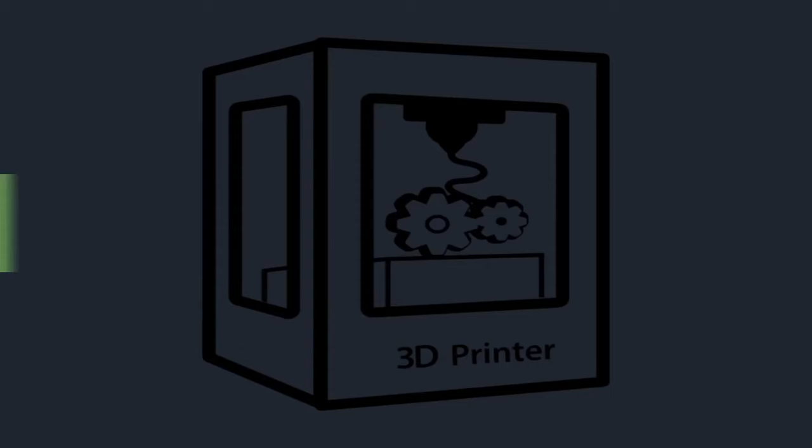Hi, we are the Make X team. After more than 1 year of development, we present our new 3D printer, the M1. This is the first affordable and high-resolution desktop DLP 3D printer available. M1 software is simple and user-friendly, while still offering rich functionality.

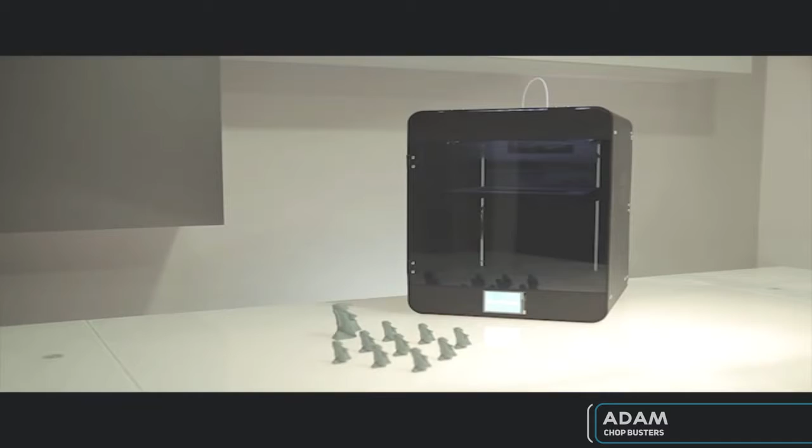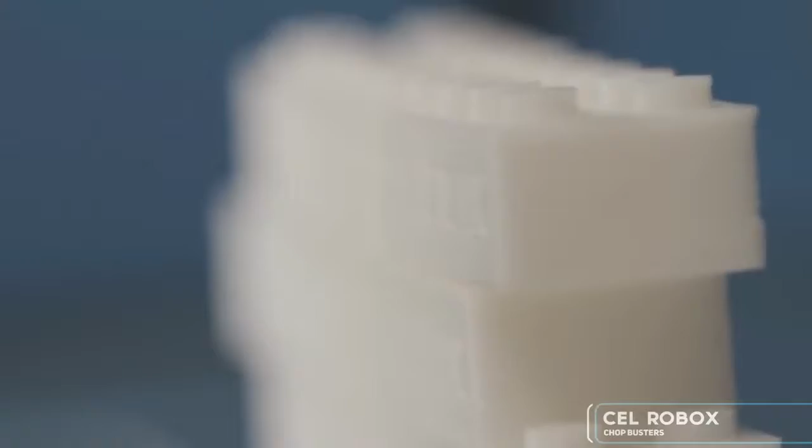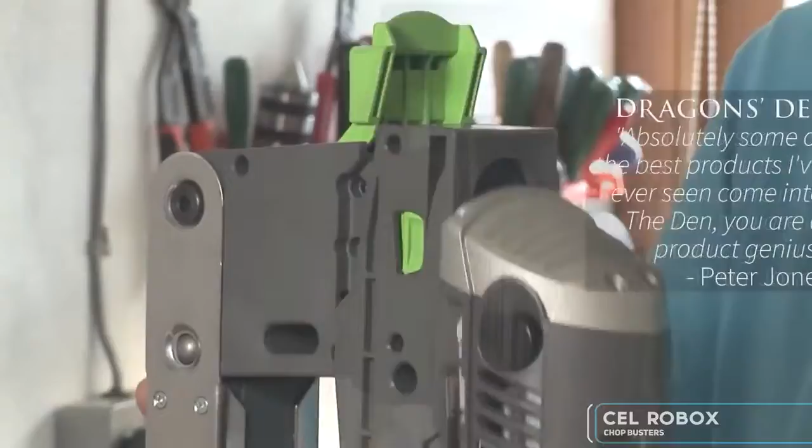This is Robox, a desktop manufacturing platform. I'm Chris Elsworthy, lead engineer for the project. CEL UK is a product design and development company based in Portishead near Bristol in the UK. We're passionate about design and we're famous for a number of consumer products that have been released, most notably the Power 8 Workshop, which was released over 3 years ago, and we now have over 10,000 units in circulation worldwide.

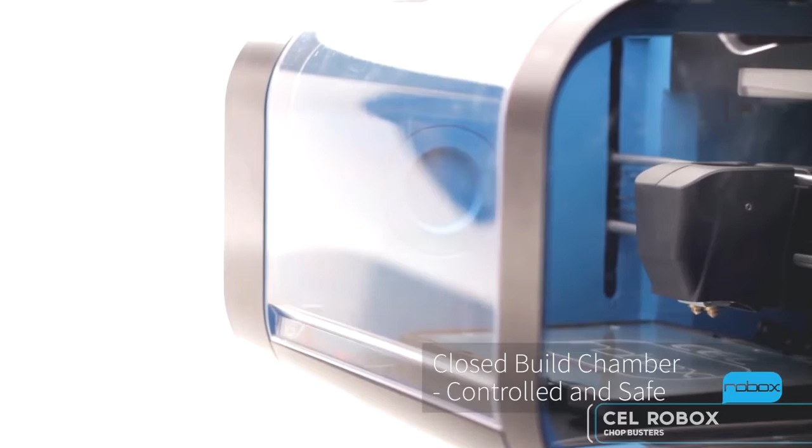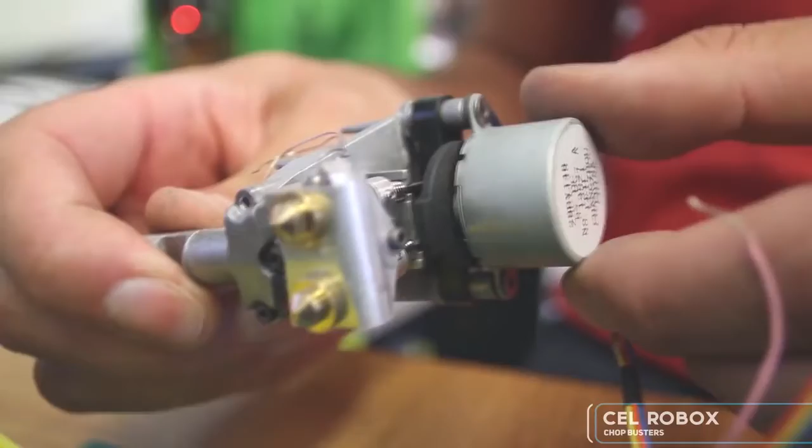Robox has every system in place to print with the materials available on the market at the moment. We have a nozzle system which includes needle valves, so we're able to shut off the flow of plastic instantly. This means no more oozing, no more stringing as you move between parts, and no more bumps on the outside. This means perfect parts every time.

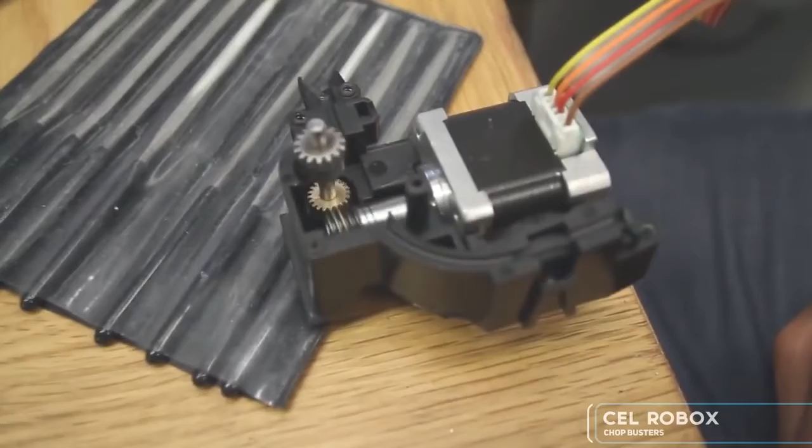We've also got a new extruder design that rather than relying on one feed wheel and a follower, we have two contra-rotating feed wheels that grab hold of the filament, ensure it never slips, always forces material to the head and reduces the chance of blockages. And not only that, the extruder includes a closed feedback system, so we have an indexing wheel that monitors the filament moving into the extruder versus that that's coming out.

So if there is any stall or blockage, the software knows straight away. As soon as it knows, it can stop the print. You can then intervene and fix any problem that may have occurred, and then the printer will resume from where it left off. Something I don't believe has yet been seen. Never before has a 3D printer been offered with this higher specification at such a low price.

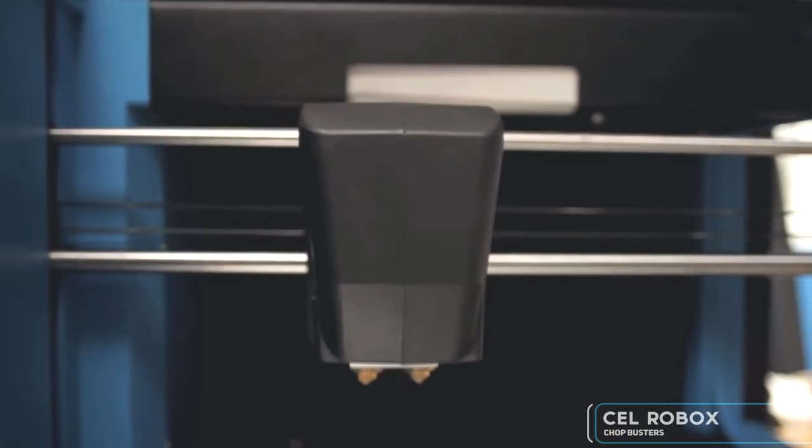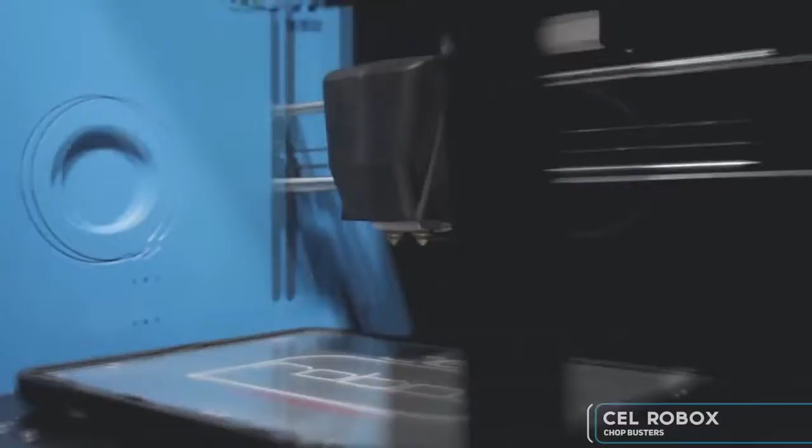In our head, we have a twin nozzle system. This has a 0.3mm and a 0.8mm nozzle. This means that you have a high resolution but low speed nozzle for completing the high quality surface finish and perimeter of the part, and then a much larger nozzle which is capable of filling the part, resulting in print times of up to 300% greater than our competitors.

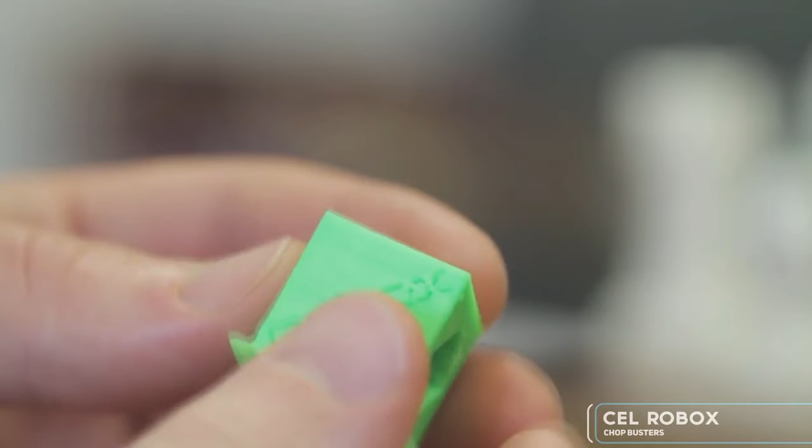Because we have a very rigid frame, we can operate the printer at much higher speeds than normal. And not only that, we have a Bowden tube extruder so that the extruder is kept separate to the weight of the head. This allows us much higher printing and travel speeds. Robox isn't just a stylish 3D printer. By simply removing the head, we can add much more functionality to our platform.

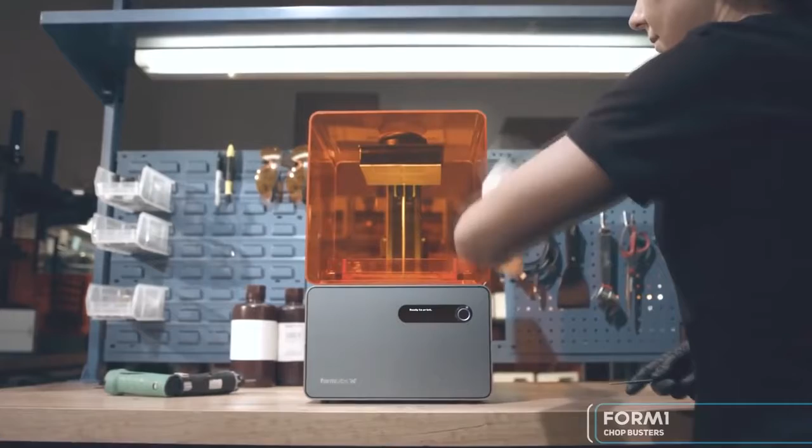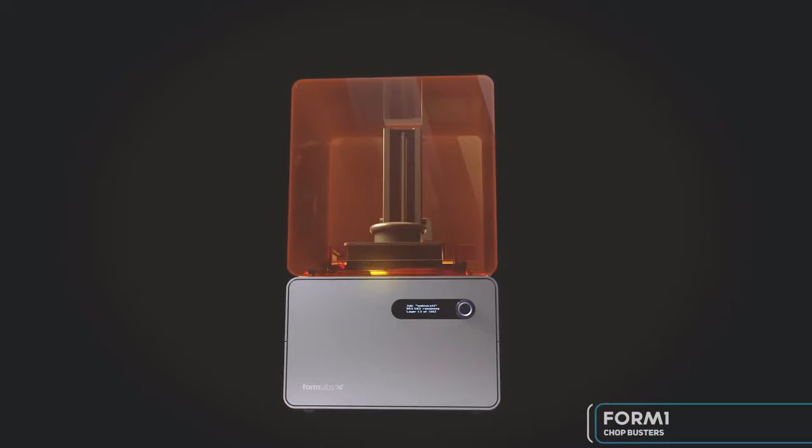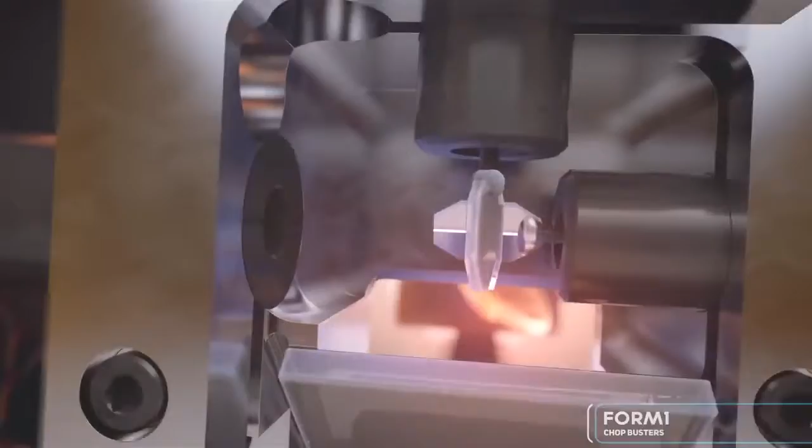With thousands of Form 1s now being used by designers, engineers, and artists around the world, we've learned a few ways to improve the world's first high-resolution desktop 3D printer. And now, we're excited to present the Form 1 Plus. First, we've added a new laser that is 4 times more powerful, cutting print time by up to 50%.

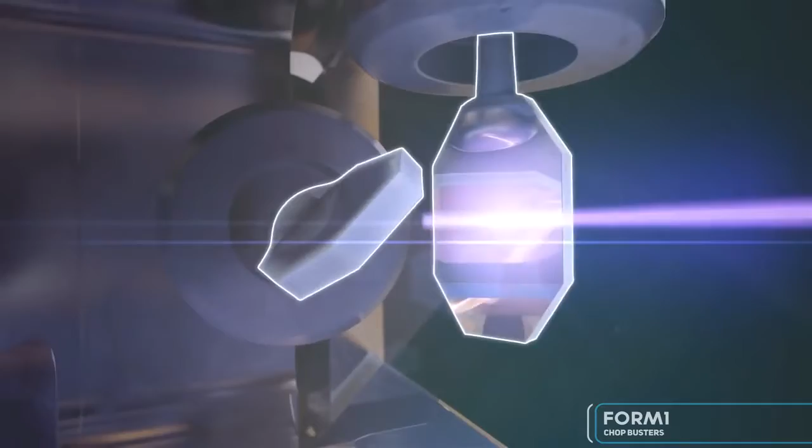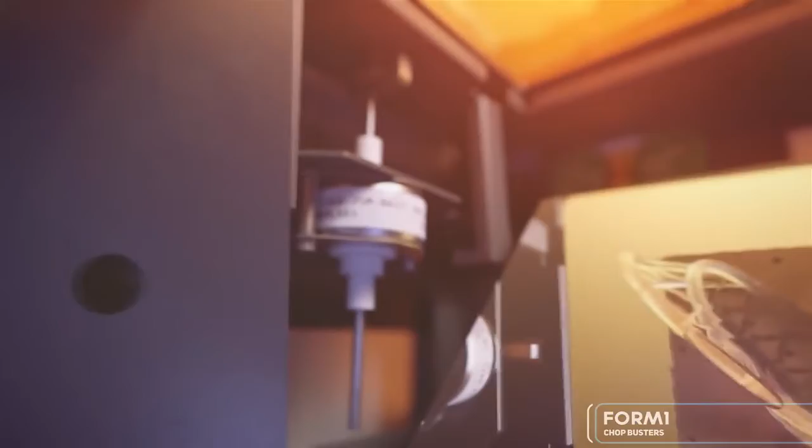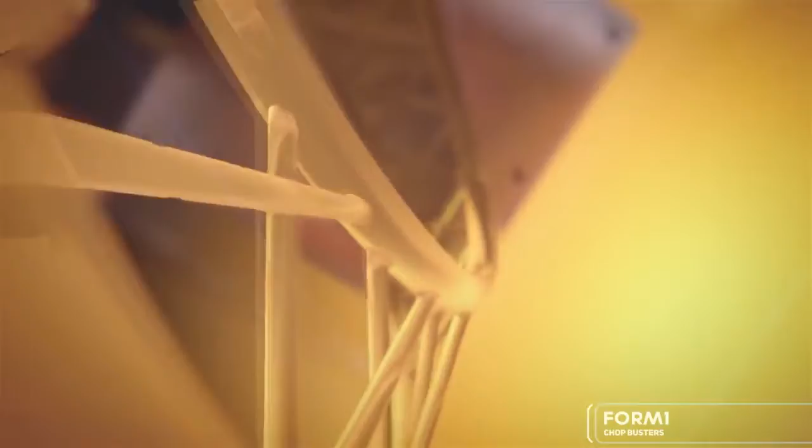At the heart of the machine's precision and resolution is a new galvanometer control system that moves the laser more quickly and accurately than the previous generation. The redesigned peel mechanism is stronger and more durable, reducing wear for better reliability. And finally, our new injection molded resin tanks are now made with orange light-blocking acrylic, allowing you to store your unused resin outside the printer whenever necessary. Thanks to these new additions, you'll be able to 3D print with increased ease, precision, and speed.

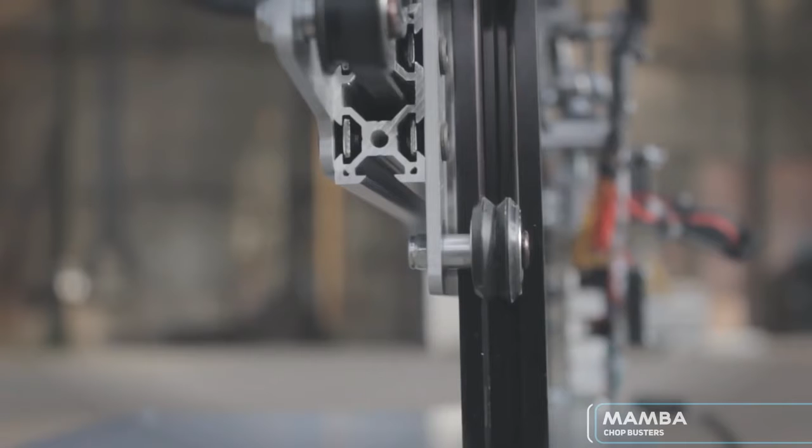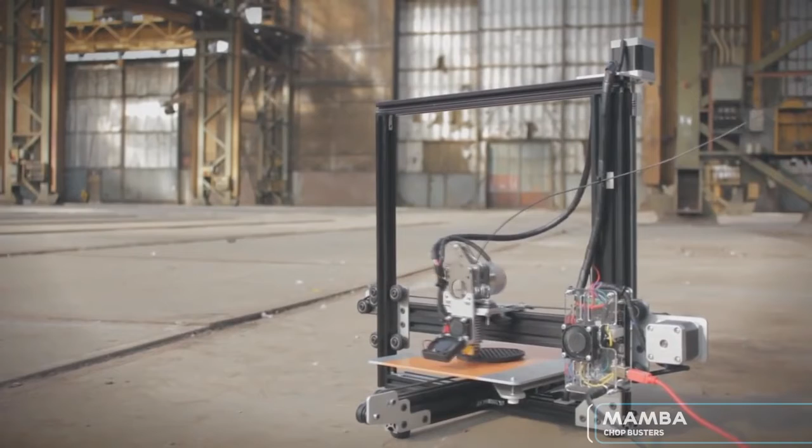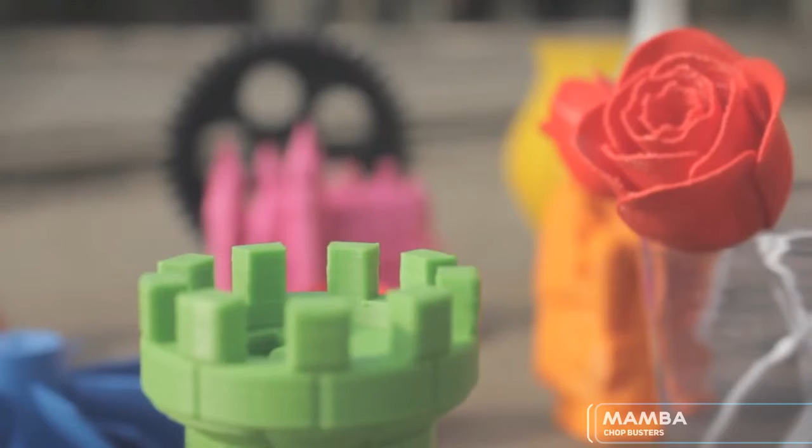Hi Kickstarter, my name is Michiel. I'd like to present to you the Mamba 3D. Two years ago I saw my first 3D printer and I was immediately intrigued by all the possibilities 3D printing could give you. So I started to build my own printer, and after seeing the prints that came off of the printer, the excitement was even greater than before. It was the first time I could physically produce products at home.

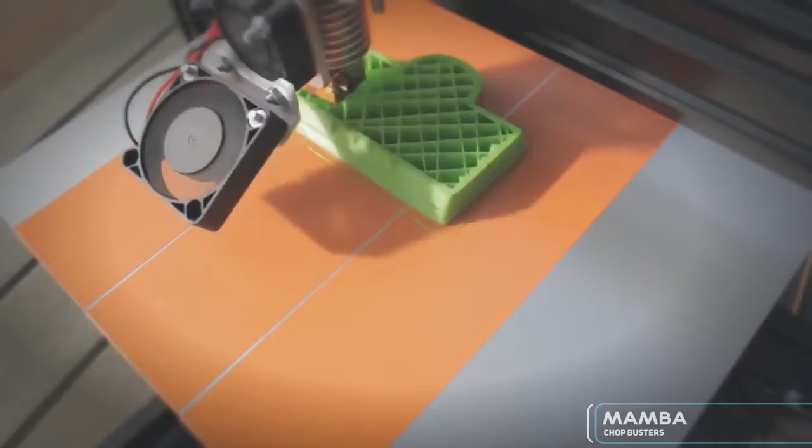For the last 10 years I worked in industrial automation as an engineer. I designed electronics, software and mechanical designs. Recollecting what was needed to build my first printer and to start using it, I noticed you need some technical skills to complete it and to use it. So with that in mind, I wanted to design a printer that was easy to build and easy to use. So we broke down the printer to its basics, just to focus on high precision, high speed and high quality.

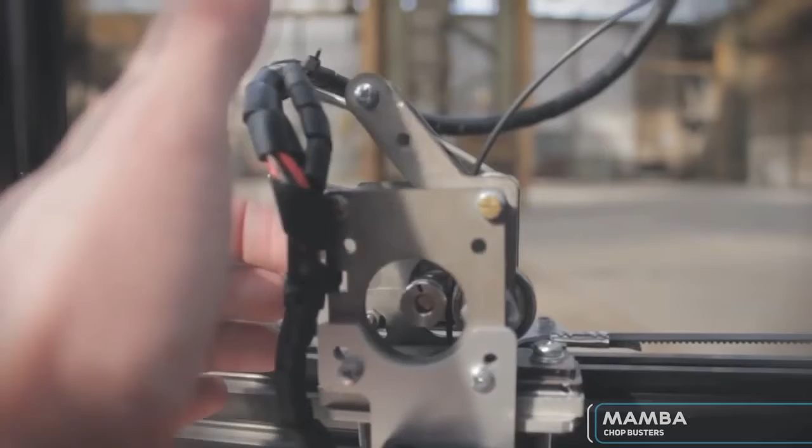The printer is made out of an aluminum frame. It's an open source hardware frame, and together with the laser cut metal plates it makes a rigid printer. We designed a custom extruder drive for the printer, so it is easy to change your filament. You just push back the lever, take your old filament out, put new one in and start printing again in seconds.

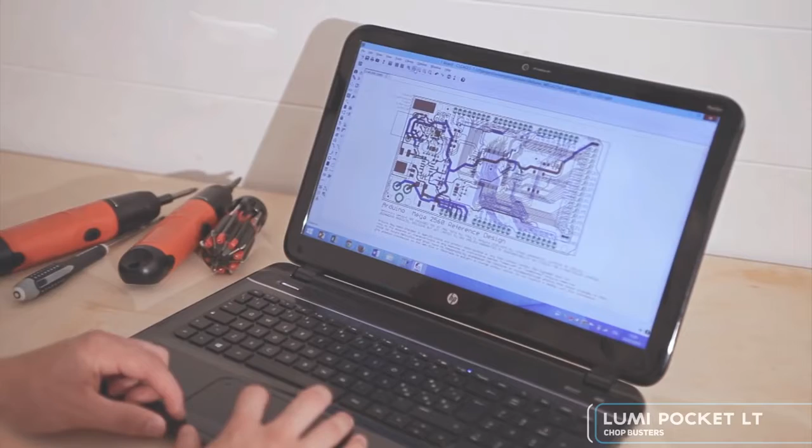Pauline needs to 3D print the jewel she has just created. Henry wants to make the PCB he has designed. Roberta would like to engrave an image on plywood for an original present. What do these people have in common? Great ideas! Wouldn't it be nice to have a single device to do all of this? How can we help them make these ideas real?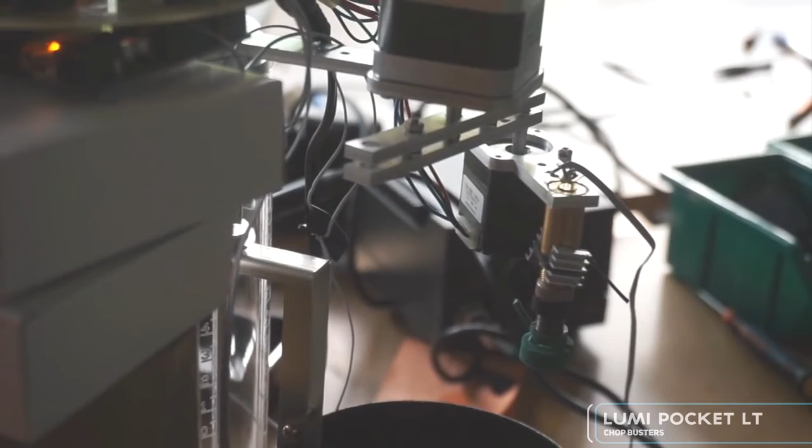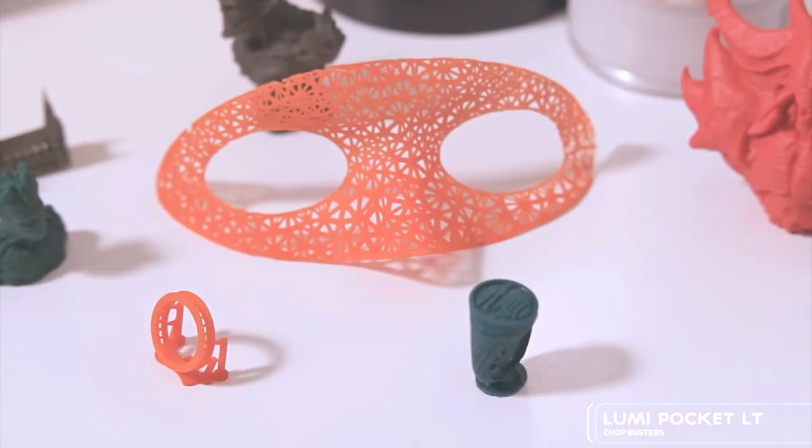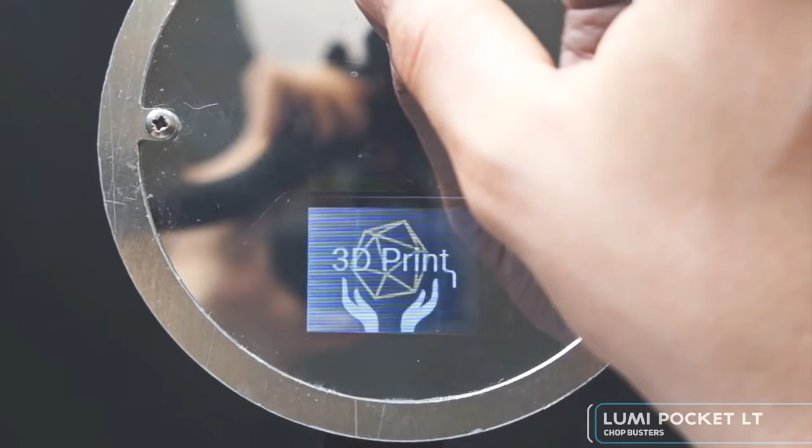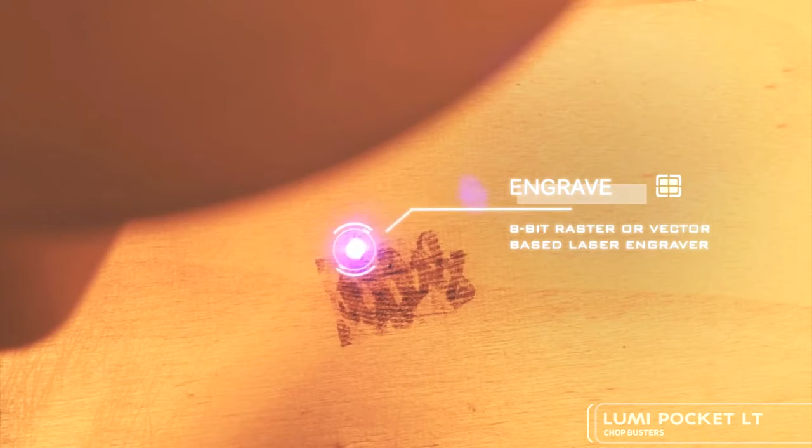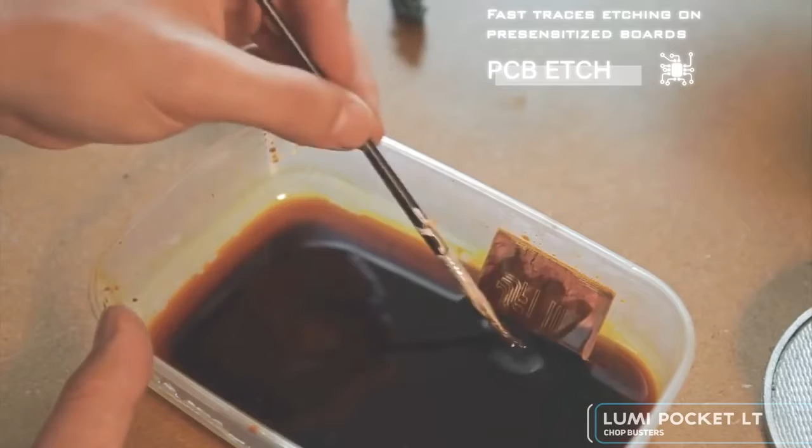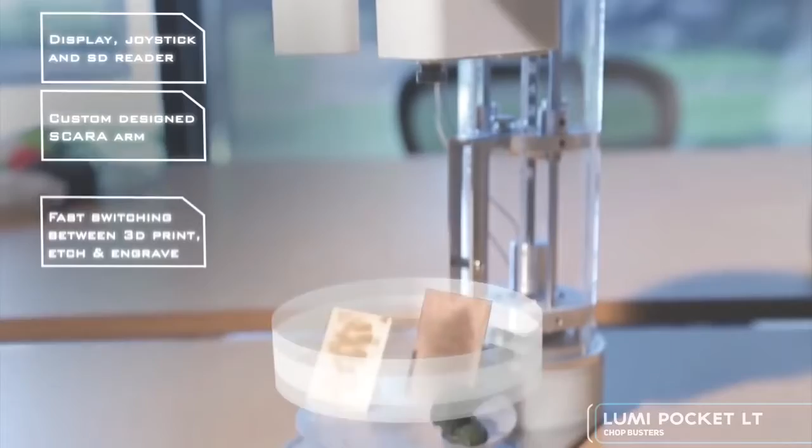We are Lumi Industry. We have developed different models, produced and shipped them to our backers. We know how to turn an idea into a product.

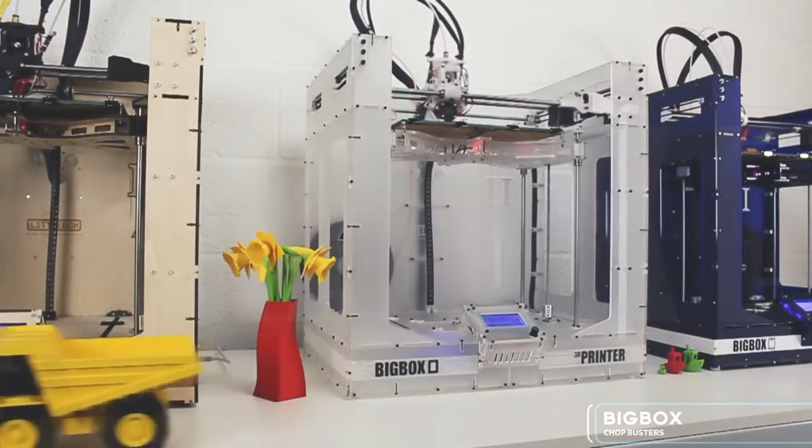I'm Josh from E3D. And Sanjay, also from E3D. I'm Greg from the Little Box Company. So we've got together and we're making a new printer called the Big Box. The Big Box is a no-compromise, high-specification 3D printer, combining the best in print quality with a huge print volume. The large build volume means that you can take on ambitious projects, getting you higher productivity, print bigger stuff, and more of it.

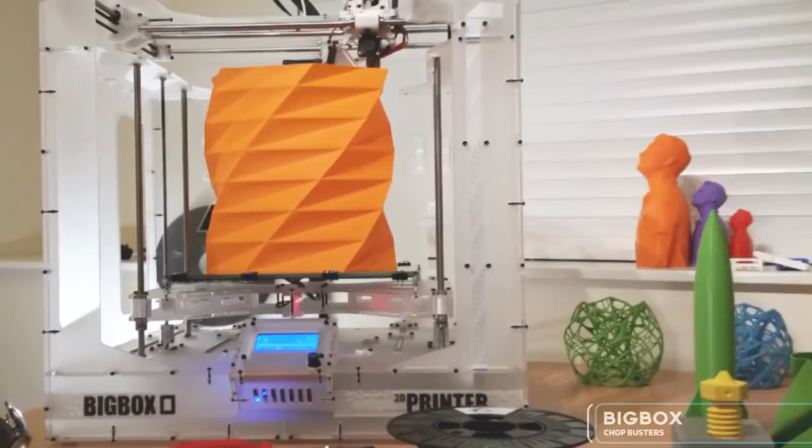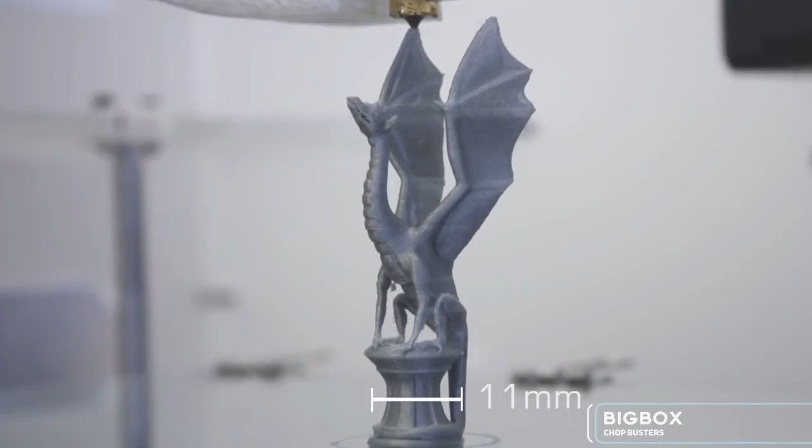Thanks to Big Box's incredibly precise motion system, you'll get twice the standard print resolution. Using an E3D extrusion system means that you can print any material, get high quality prints, and have a modular printer that can grow as you take on new projects. Big Box has great cable management and ease of access. We've integrated a universal spooling system and made Big Box simple to use with a standalone controller.

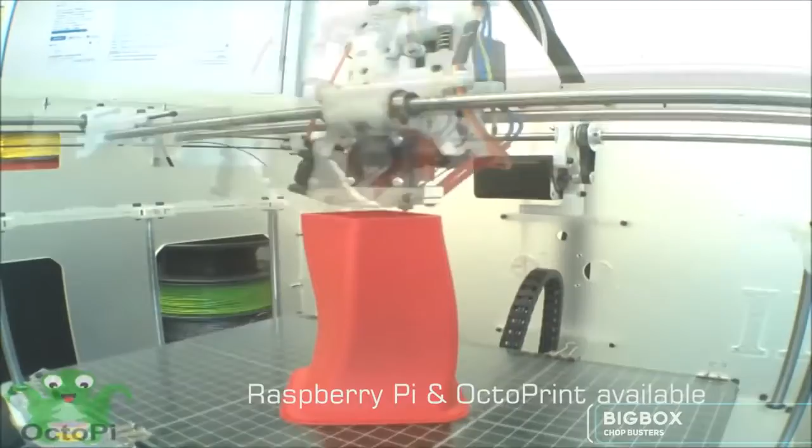Big Box brings together experience in designing super precise, very high resolution motion systems for laser cutters and implements that with 3D printing hot end from E3D.

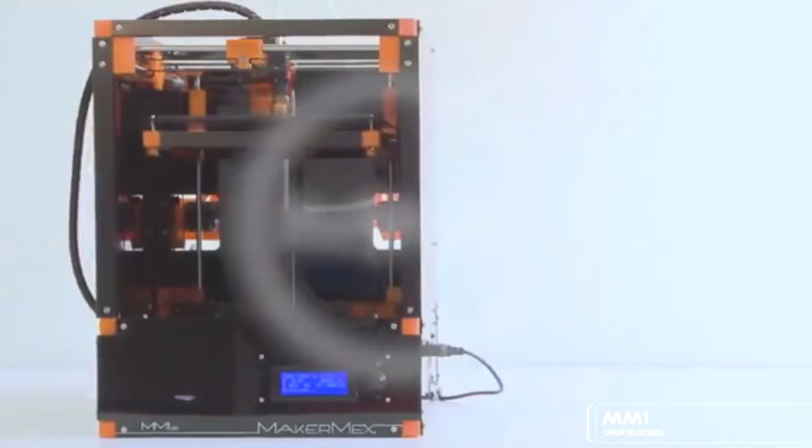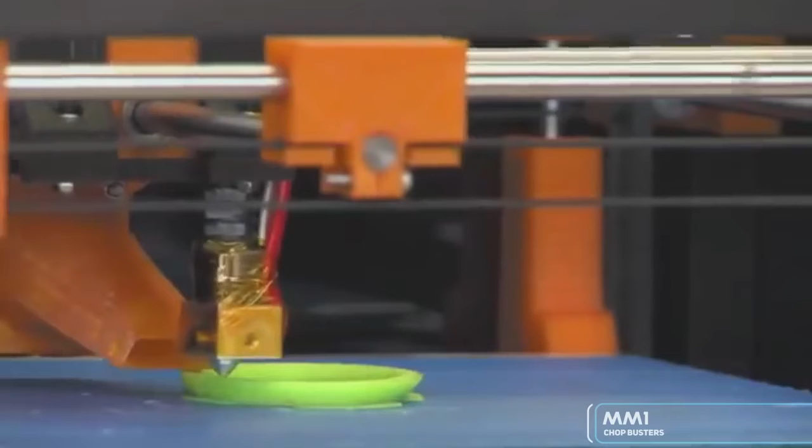This is the MM1, the world's first modular 3D printing system. Here at MakerMex, we are makers, just like you. And makers never settle for simple. We never settle for completed. We are always modifying and improving what we have. That's why makers are so great. And we see how the world of 3D printing is changing so quickly. And let's face it, nobody wants to spend their hard-earned money on something that will be outdated in 6 months.

So we thought to ourselves, why settle for a 3D printer that can only do one thing? Why can't my printer easily switch from printing biodegradable PLA right over into printing high-temperature polycarbonate? Why can't I print high-quality prints with a dual extruder setup, and then doodle 3D icing on my kid's cookie a couple minutes later? Or in 6 months, why can't my printer do what all the new printers can do? Why do I have to buy a new one?

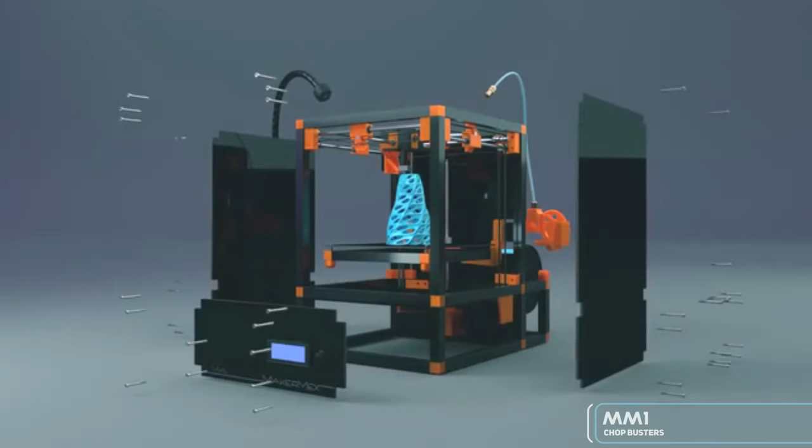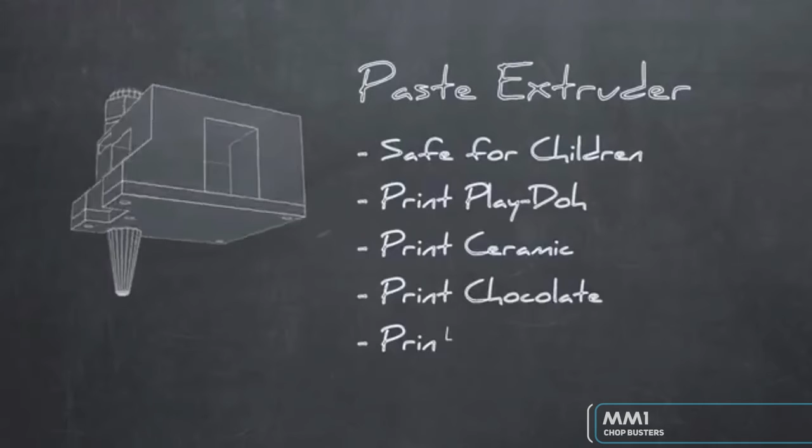We think that's crazy. That's why today we introduce you to the MakerMex MM1 modular 3D printing system, a fully modular 3D printing system that allows the user limitless 3D printing potential. Our system currently has several modules developed for easy-to-use fun for the whole family. Simply swap out the single extruder for our paste extrusion system, or for advanced printing, swap the dual extrusion heads, or even our high-temperature head for the more advanced makers.

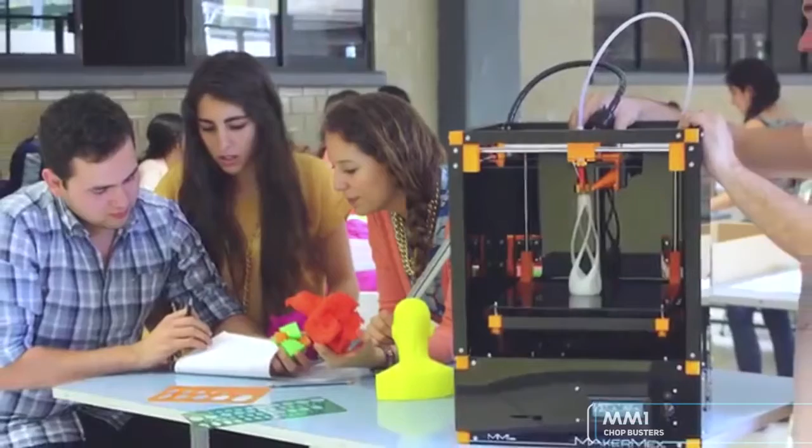With just a few clicks and a couple minutes, the user can easily modify the printer to the medium they desire, making the MM1 modular 3D printing system great for home, office, or the classroom.

I was immediately surprised by the beauty and elegance of this design compared to all of the other 3D printers. We're using 3D printing to create custom GoPro mounts. It's a gorgeous looking printer. These guys have really done their homework, and it's definitely going to be integrated into our whole film production pipeline.

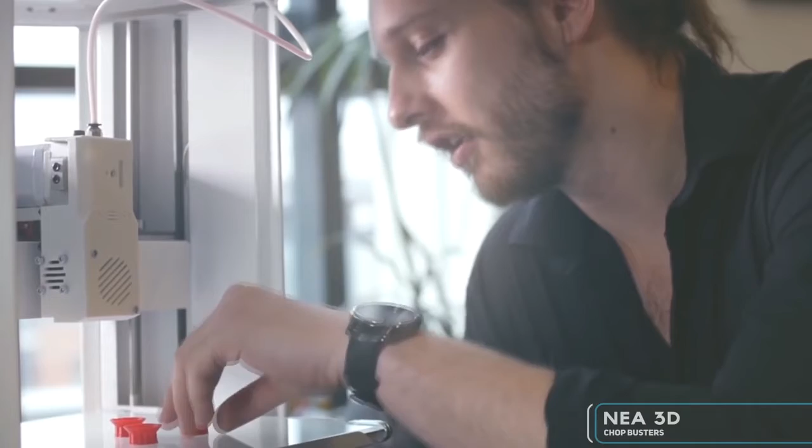A true desktop printer should be compact, good looking, super easy to use, and most importantly, reliable, right out of the box. And this is why NEA was created. NEA is round, sexy, and minimalistic, but not without cause. NEA's cylindrical shape adds to the overall strength and stability compared to conventional box-shaped printers. We know that desktop real estate is crucial. That's why NEA's footprint to build volume is unmatched. We like to say, if you got room for a lamp, you got room for a NEA.

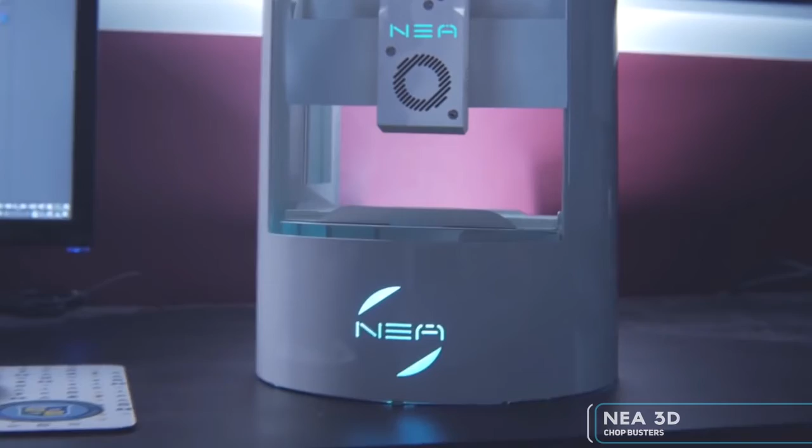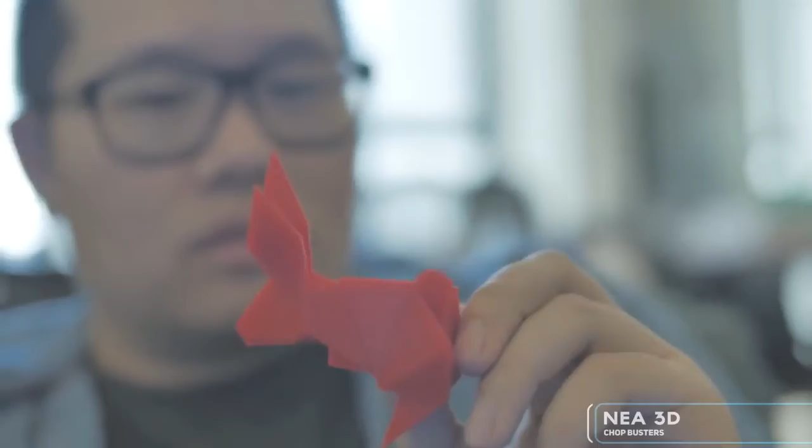Out of the box, NEA is ready to print with easy-to-use, feature-rich software and our very own Cool Spool filament cartridge. However, feel free to use any open source software and third-party filament that is compatible. NEA will give you the print quality and speed of an expensive machine, but at a much more affordable price. But don't let the prices fool you. NEA is made smart, not cheap. Our printers are designed, manufactured, and assembled right here in North America, using only high-end electronic components and hardware.

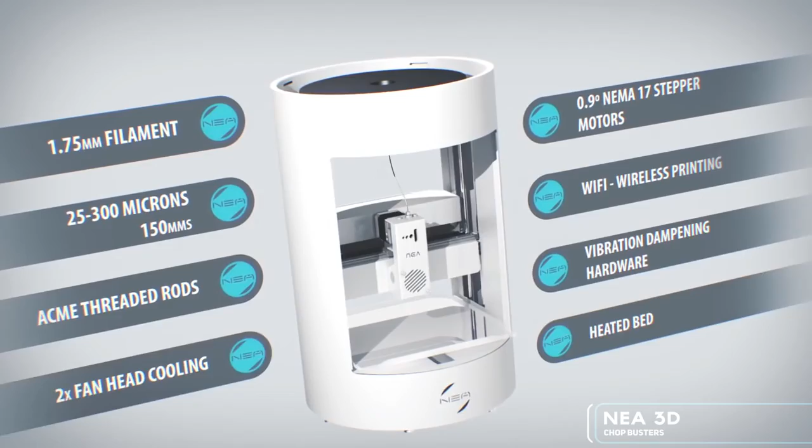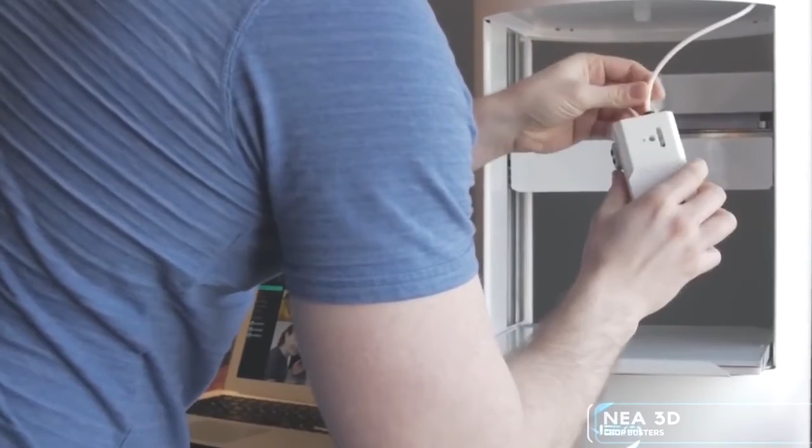And in order to be future-ready, NEA is modular. Once upgrades are available, easily swap out the standard components for future innovations that are already in the works. Don't be left behind with an obsolete unit. It's the best of both worlds. Beautiful like a Mac. Whoa! But upgradable like a PC.